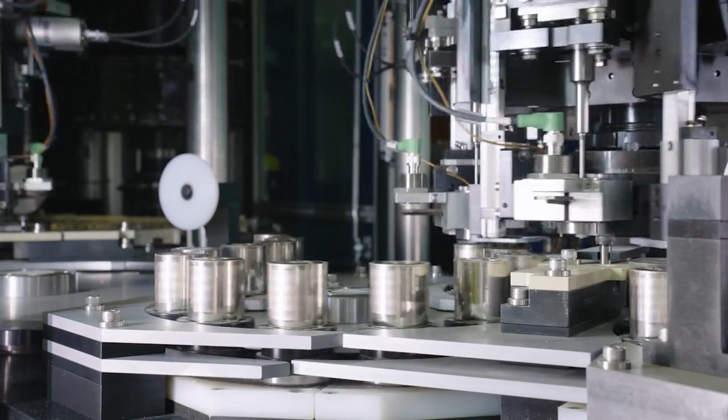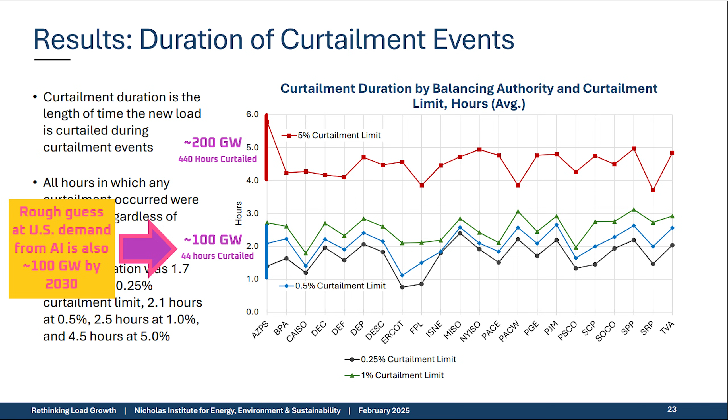In the last video of the Terawatt compute series, I showed that around 100 gigawatts of additional power is available on the US grid that's relatively easily accessible, which roughly matches the additional compute demand from AI that's expected by 2030. However, increasing pushback against data centers means that over the next 3 to 5 years, tech companies will likely start building their own generation off-grid. And after that, into the 2030s, space-based compute will become increasingly viable.

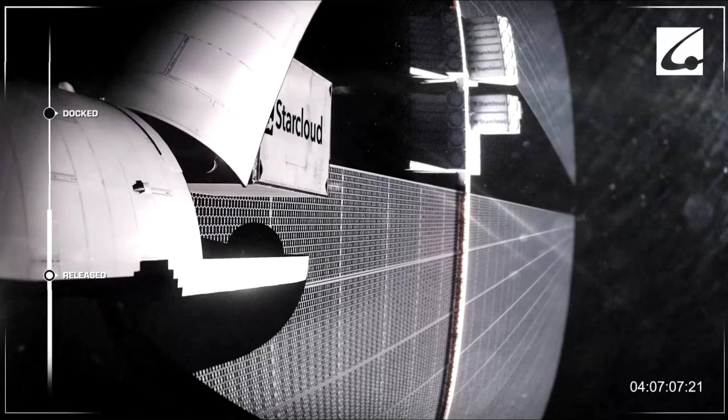So today, I'll cover how power generation for off-grid data centers will evolve, and how that could affect the end-to-end power supply of data centers. And in the following video, we'll look at the challenges, opportunities, and economics of space-based compute.

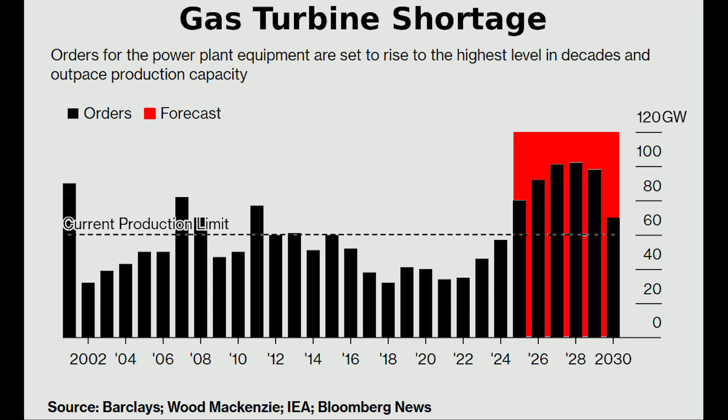That brings us to the second reason why 100% solar and battery systems will become more likely over time. The cost of solar and batteries are plummeting, so it's likely that by 2030, natural gas may just add cost and complication for a company that wants to build its own grid. If you had a natural gas turbine factory, why would you expand production if you can see that within the next 5 years there will be another, more scalable and cost-competitive technology eating up your market share? It makes more sense to just keep producing gas turbines on fully depreciated equipment until there's no longer demand for them.

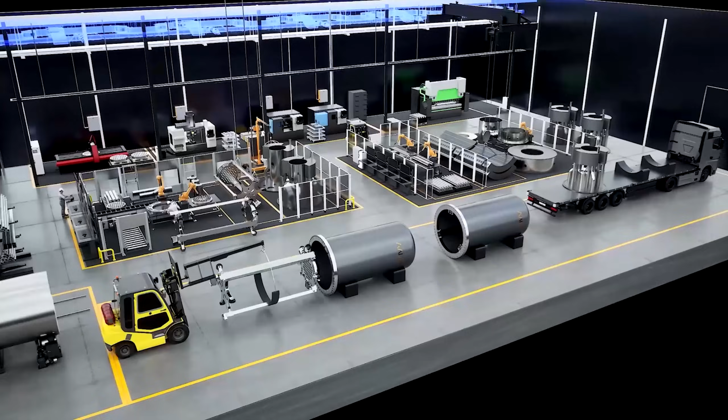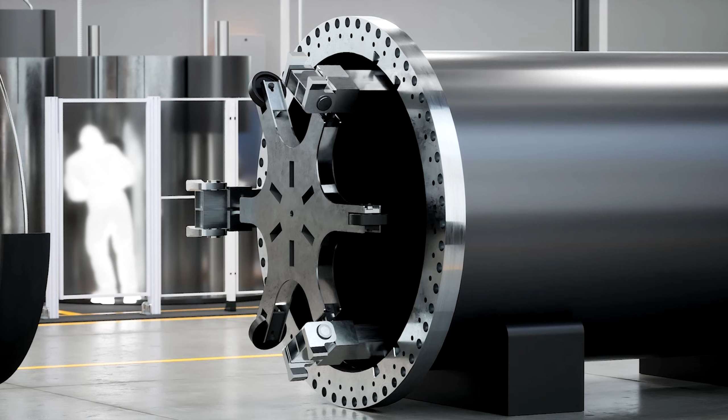What about other generation technologies? Let's run through the ones that are the most likely to come up in the comments. First, nuclear. In the US, we aren't going to see nuclear power at any large scale of deployment before 2035. Yes, the Trump administration is pushing hard on advanced nuclear reactors, but most are still currently at the prototype stage. After that will be full-scale commercial reactors, and then only after that will we see those nuclear reactors produced at high enough quantities to generate low-cost power.

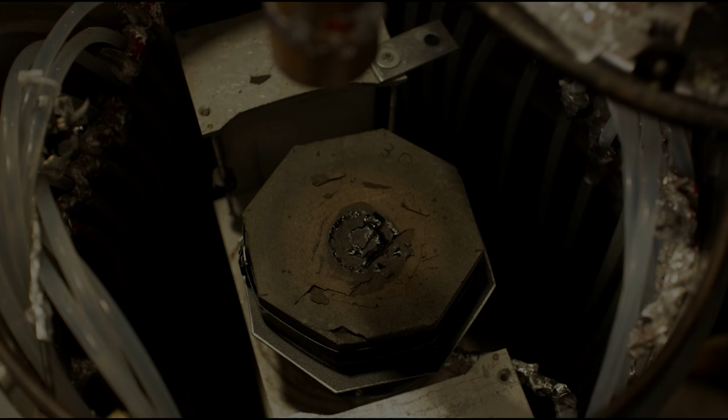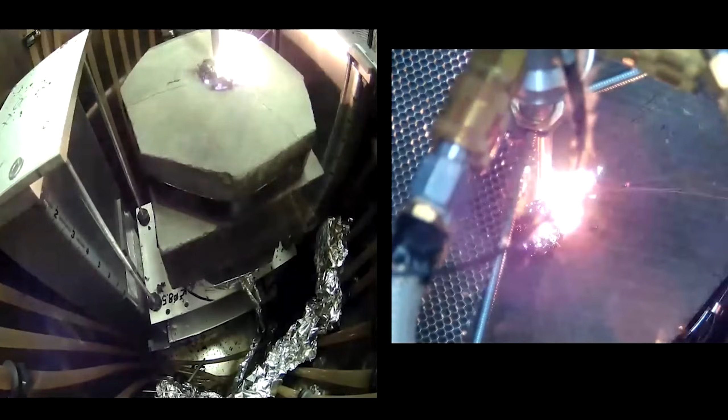Each of those steps will take several years. Second, geothermal. There are new geothermal technologies that do look very promising, but they're still at the prototype stage. So even if new geothermal technologies are successfully commercialized, it will likely be 2035 before we see them at scale.

Third, new coal generation is too expensive. Existing plants will keep running, and some shuttered plants will be restarted due to strong electricity demand, but that's about as far as it will go. Fourth, any type of hydroelectric power and pumped hydro is geographically limited, often faces public pushback, and takes a long time to build, so it's mostly a no-go.

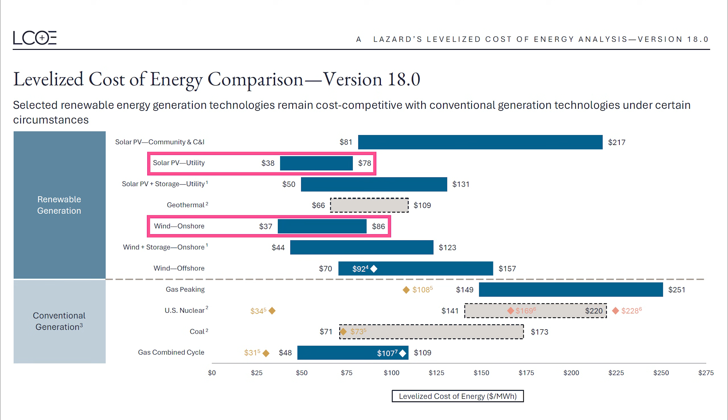Fifth, wind. Wind power is currently roughly at cost parity with solar, but the cost of solar is dropping more quickly, which means that in the future, in most cases, solar will be the preferred option. With all that said, some people might point out that solar, natural gas, and batteries face their own challenges as generation options. And that's true, but the challenges are less severe.

Starting with solar, it's currently facing political headwinds. However, that will only slow deployments, not stop them. Let's look at two examples. First, the Trump administration has said that they'll no longer approve solar projects, but that only applies to projects on federal lands or that receive federal funds. They can't do much to stop private companies from building their own solar projects off-grid.

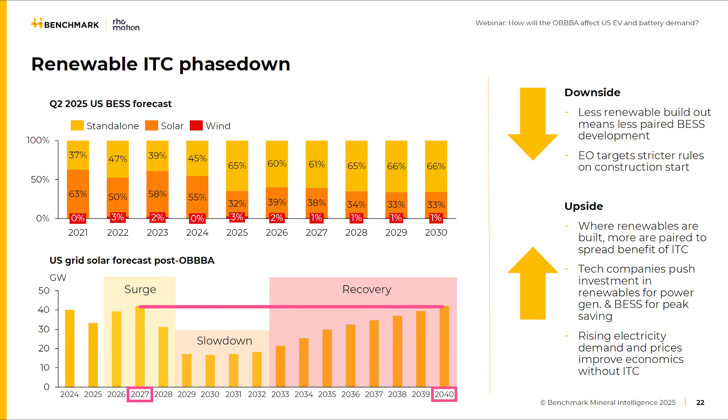Second, solar faces headwinds from both tariffs and a loss of tax credits for solar. The impact of those costs could kneecap grid-based solar deployments for over a decade. However, I think it's going to be a different story for off-grid deployments for data centers, and they'll be relatively immune to those headwinds. Why?

Power only makes up about 10 to 11% of the cost of AI cloud compute, which means tech companies can afford to pay a premium for the electricity with little effect on their bottom line. Their main concern is speed of deployment and scalability, which is where solar panels shine. They can be deployed rapidly and are available in huge quantities.

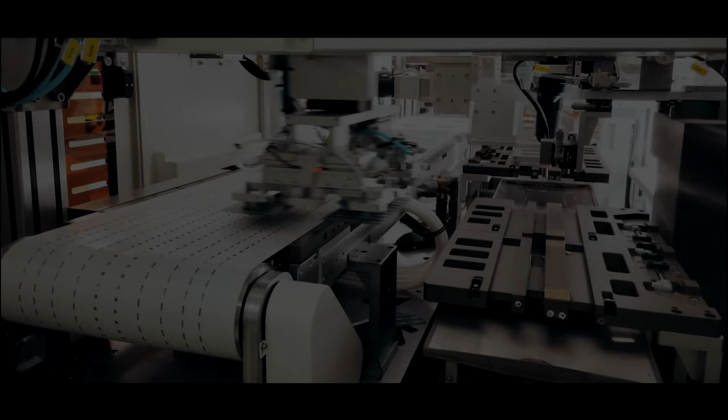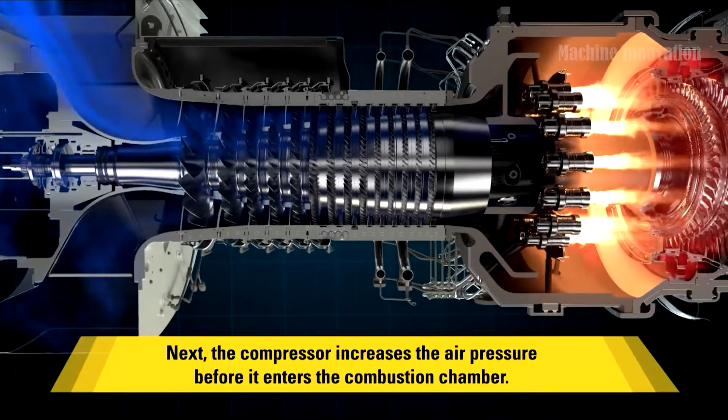As a side note, why is the production of solar panels scaling so quickly, and why is their cost dropping so rapidly? Because they're simple to mass produce using high throughput, highly automated, repetitive processes. That's as opposed to, for example, a natural gas generator, wind turbine, or nuclear plant that involve thousands of non-identical parts, which makes mass production and therefore scaling more complicated, slower, and costly.

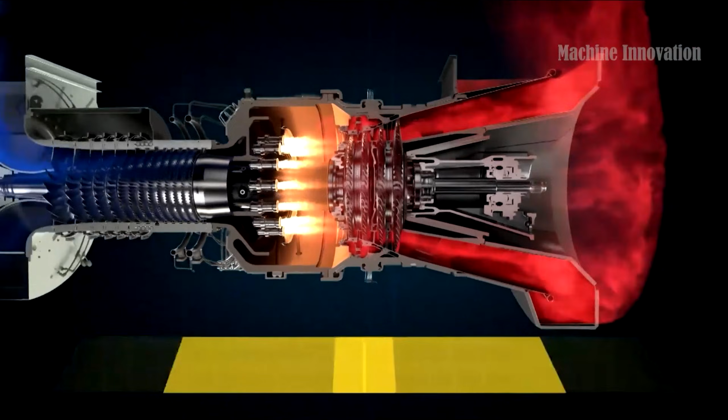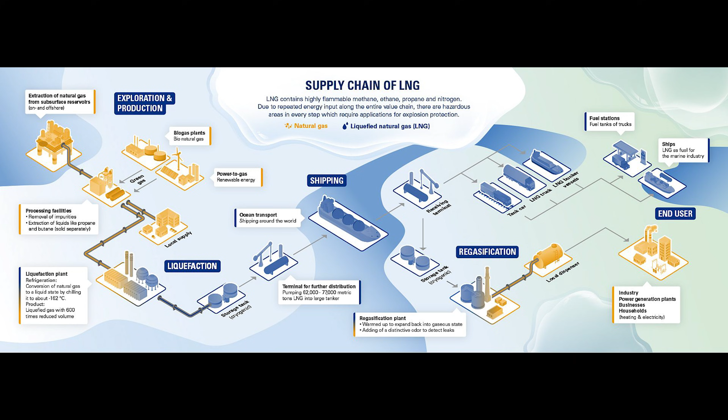Moving on to gas generation, besides the difficulty of manufacturing the equipment itself, even one highly efficient combined cycle gas turbine requires billions of cubic feet of gas per year to operate. That means developing and maintaining a huge amount of infrastructure to supply that gas, not to mention the cost of the gas itself. That's as opposed to solar panels, which have their fuel, photons, delivered weightlessly through space, directly from the sun, for free. That means relatively high upfront costs, but lower costs over the life of the asset.

Moving on to batteries, their primary drawback is that they need to be combined with other generation technologies to be useful. But in doing so, they provide such extraordinary utility that the market for battery grid storage products is exploding. That's because they increase the commercial viability of whatever on- or off-grid system they're plugged into.

If they're combined with fixed generation like nuclear, for example, they can step in to cover power demand surges. And if they're combined with intermittent generation like solar, for example, they can store the cheap, zero marginal cost power from the production peaks and release it later.

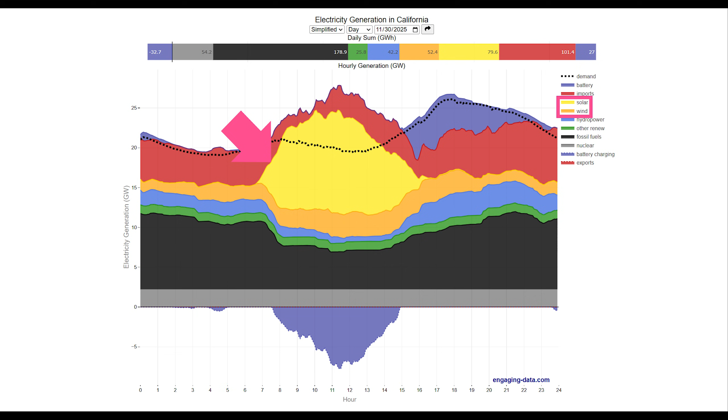With all that in mind, it should help explain why in the next few years the best combination of technologies to use for an off-grid system is solar and batteries with a splash of natural gas. Then, when the cost of solar and batteries comes down even further, switch to a system that's fully powered by solar and batteries. And that roughly aligns with Elon's estimates.

Although his reasoning was more likely tied to scalability, he said that for a data center of around 100 gigawatts, which should happen in about 5 years or so, the best option is probably solar and battery powered.

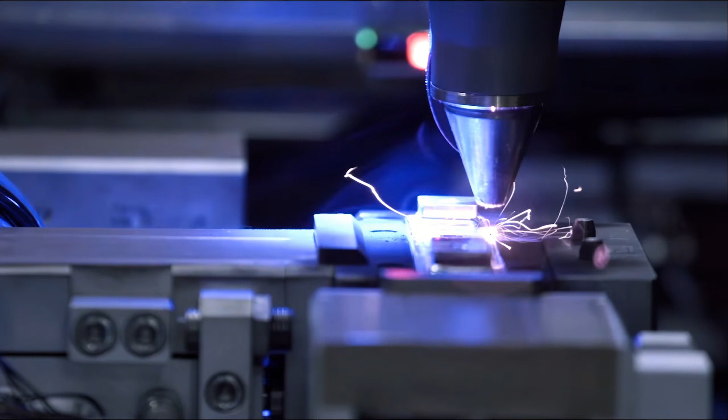With that in mind, let's look at how Elon expects to source the solar and battery capacity necessary to support 1 terawatt of compute. As for the battery storage, for Elon's companies at least, I don't see a bottleneck for the foreseeable future. That's because Tesla is aggressively expanding their production of Megapacks. Yes, those Megapacks are dependent on battery supply, but globally there's a huge and growing supply of battery cells, and Tesla's working on their own in-house supply.

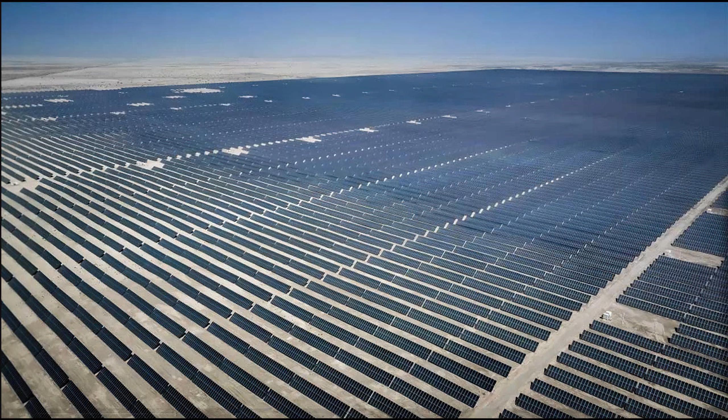However, with solar panels, things get more interesting. Let's take a look. Globally, there's already at least 1.2 terawatts of solar panel production capacity, of which only about half is being utilized. That means Elon's companies don't necessarily need to get into solar panel manufacturing to achieve Elon's compute ambitions. If that's the case, why is Elon teasing that it could be on the table?

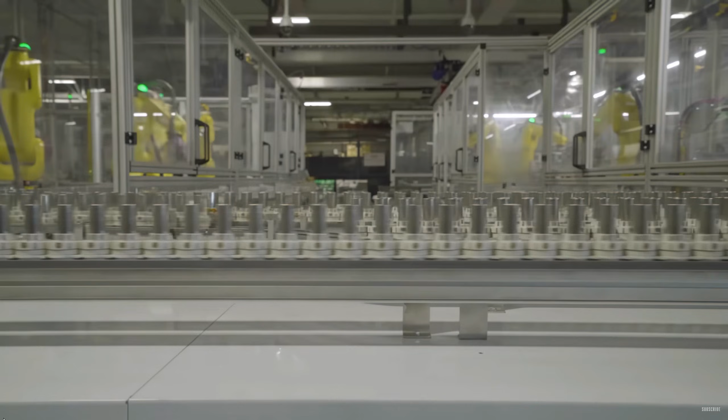First, it may just be that he's not necessarily looking at manufacturing solar panels in-house, but rather forming a tight partnership to manufacture solar panels like Tesla did with Panasonic and batteries. However, if Elon's ambitions outpace his suppliers, which often happens, Elon will bring it in-house.

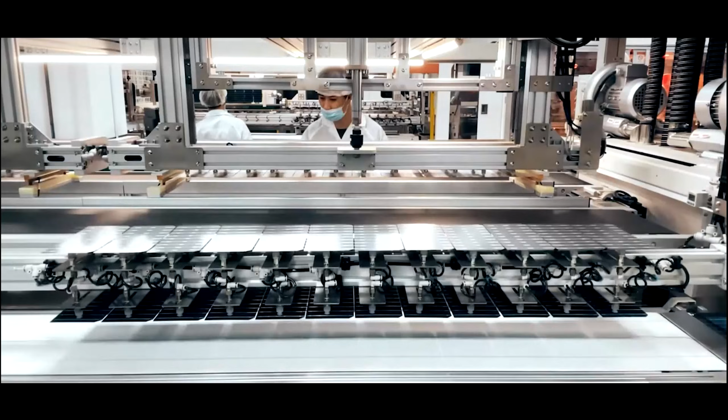Second, it might be worth manufacturing solar panels in-house just for the cost benefits. Currently, solar panels cost several times more in the US than anywhere else in the world. If the panels were manufactured in the United States by Tesla using highly automated facilities to reduce tariff and other costs, they could reduce the cost of their solar panels by at least 50% and likely closer to 70%. How much could that save?

1 terawatt of compute would likely require something like 10 terawatts of solar panels to cover the fact that those panels will only generate power about 25% of the time, and will have to be overbuilt to cover difficult periods like the middle of winter. A 50 to 70% cost reduction, or around 25 cents per watt, would net $2.5 trillion on 10 terawatts of solar panels, making in-house production worthy of serious consideration.

Lastly, besides removing potential scaling constraints and offering cost reductions, a third reason Elon might bring solar panel production in-house is if it becomes necessary for space-based compute, which may require specialized panels. But that's a topic for another video.

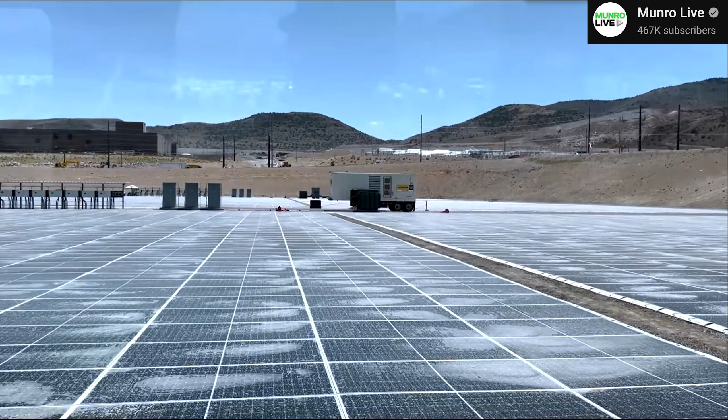Either way, whether the solar panels are produced in-house or purchased from a third party, building a terawatt of solar in the desert for AI compute could be done at low cost and as quickly as xAI or any other company could throw solar panels on the ground. In fact, as I said in the last video, it might actually be cheaper to go off-grid, because 2/3 of the cost of electricity is the extension cord, so to speak, that runs from the generation source to the data center. Another way to save money by going off-grid would be to strictly use DC power.

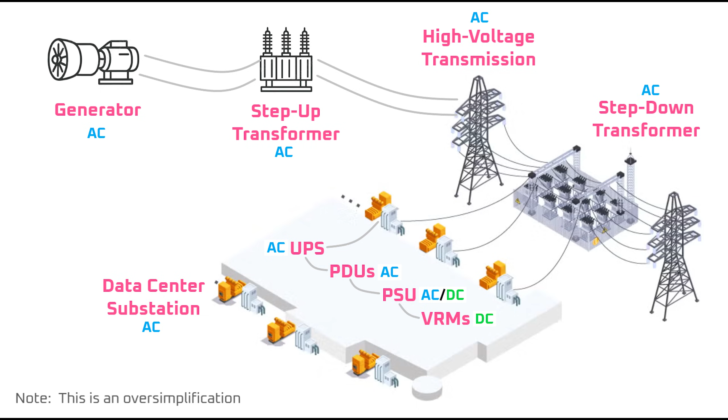The way AI data centers are run and powered currently is by taking mid or high voltage AC power from the grid and stepping it down to lower DC voltages to run the compute. That takes a lot of power conversion equipment and causes some of the power to be lost as heat energy. With an off-grid system, the power conversion could be mostly eliminated because solar panels and batteries naturally operate using DC power. Creating a purely DC setup would take a large initial investment, but if the ultimate goal is 1 terawatt of compute and beyond, it would be worth it.

Then, within maybe 5 to 7 years from now, they could have enough engineering headroom and will have had enough development time to make a version 3.0 data center that uses end-to-end DC, which could be the architecture that eventually takes them to 1 terawatt of compute. That's a wild guess on my part, so take it with a grain of salt. But I think it's a very real possibility given Elon's constant drive to eliminate parts and complexity.

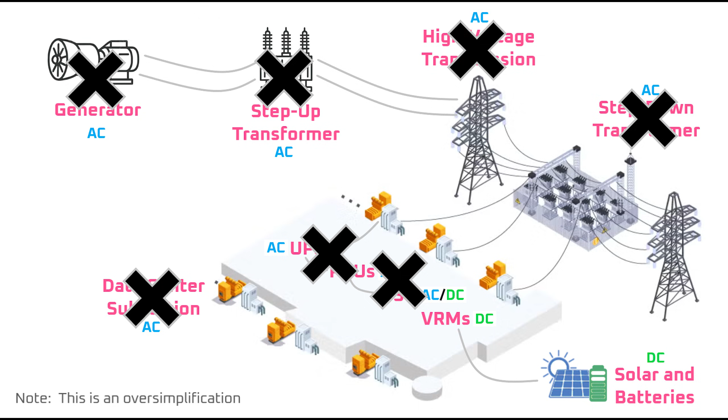With centralized compute out of the way, let's briefly cover the distributed compute that will be used in products like Optimus robots and robotaxis, which could demand an order of magnitude more power than the data centers.

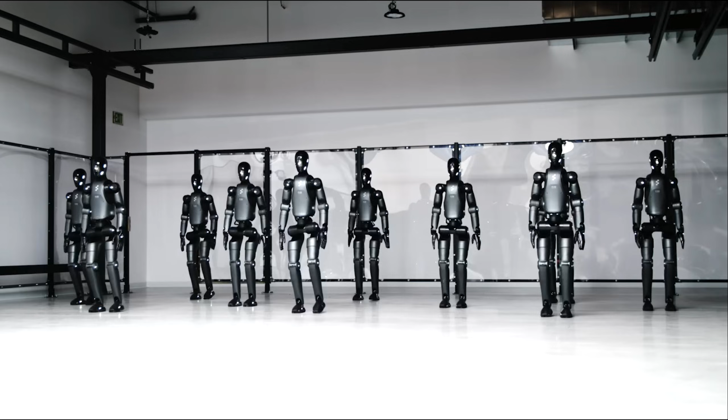Distributed compute is a more complex topic to cover because rather than involving singular data centers owned by individual companies that can operate their own off-grid generation, it will involve thousands of hardware and software products owned by millions of people that will be powered by a variety of generation sources. With that in mind, these are the broad strokes.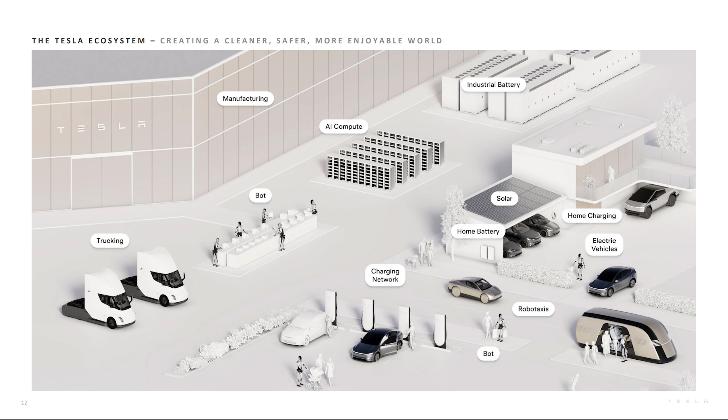For the compute itself, the deployment will be straightforward. The CPUs in many existing smart products will be replaced with AI chips, and there will be a variety of new products and services like robots and robotaxis. It's generating and delivering the power to that constellation of devices that will become tricky. The power could be delivered by the grid, or it could be generated more closely to those devices with rooftop solar and batteries. Each of those solutions face issues.

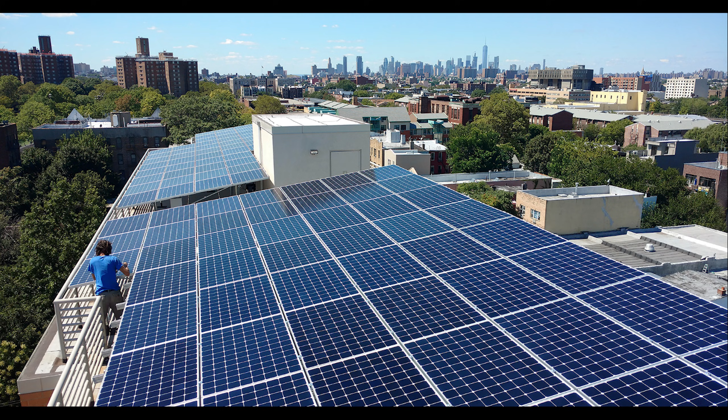For grid-based power, it takes, on average, 5 years to connect new power generation. And as I said a moment ago, it's costly to maintain the transmission and distribution to deliver that power, which makes up most of the cost of electricity. Rooftop solar is often the best and cheapest way to generate power because it sidesteps the drawbacks of building on the grid. But even in a best-case scenario, rooftop solar would provide only about 1.1 terawatts of power. That's because there's a finite amount of roof area. Not all roofs are structurally suitable for solar. They receive too much shade, or they aren't at the correct angle or face the wrong direction.

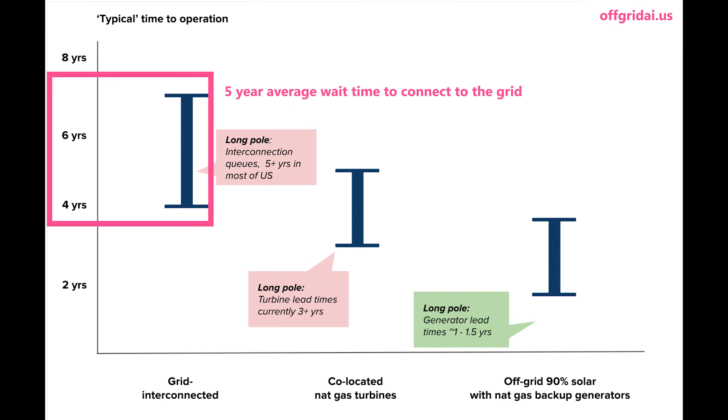In my view, this means we need to solve the fundamental problems associated with grid-based power. Stanford's 6 big ideas to help avoid a U.S. electricity crisis suggest ways to do just that. And for me, the most critical of those are streamlining permitting, making grid policies more flexible, and modernizing utility operations. With those changes in place, the free market would deliver the 10 terawatts or more of power generation that will be required for Earth-based distributed AI compute.

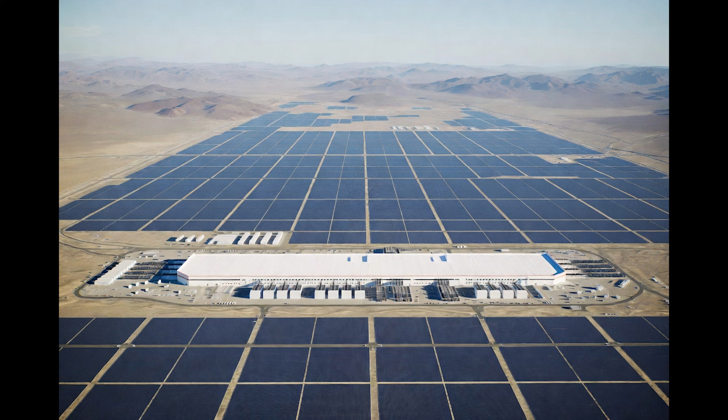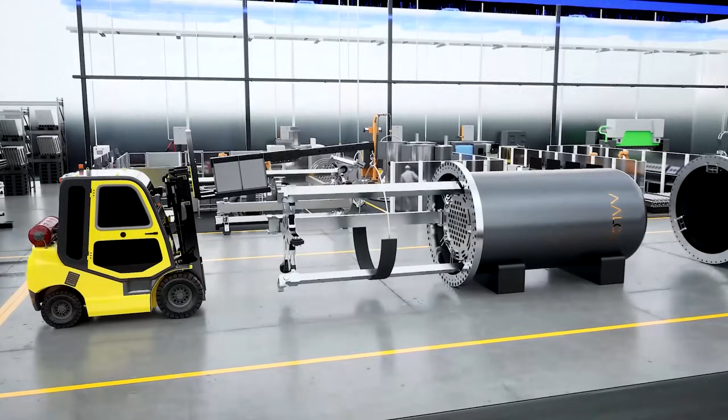In summary, for the foreseeable future, the clearest path to Elon's goal of 1 terawatt of centralized compute is solar and batteries deployed in the desert, with natural gas generation necessary in the short term and becoming optional in the long term. Deeper into the future, there may be other options like advanced nuclear and geothermal to firm up the solar and batteries, but they won't form the bulk of the generation.

The question is, how long will it take Elon to hit 1 terawatt of compute? Estimates are that globally, we could need 2.6 terawatts of compute for AI by 2035, and by 2040 it could be as much as 11 terawatts. If that holds true, it indicates to me that if Elon's companies take a reasonable share of the global market, that they'll hit 1 terawatt of compute between 2035 and 2040. That sounds unbelievable because it's the equivalent of matching the totality of the current power generation from the U.S. grid in 10 to 15 years.

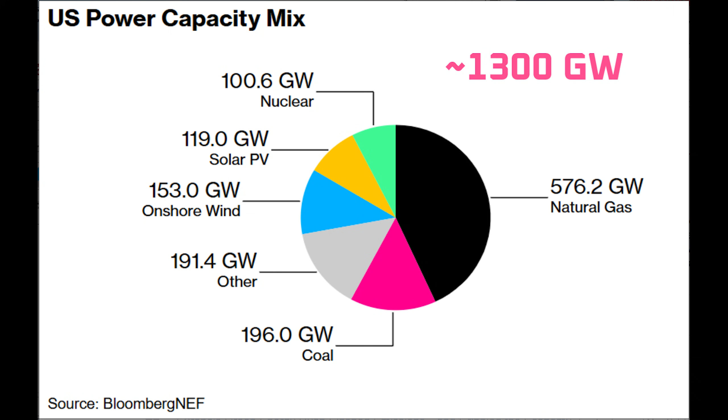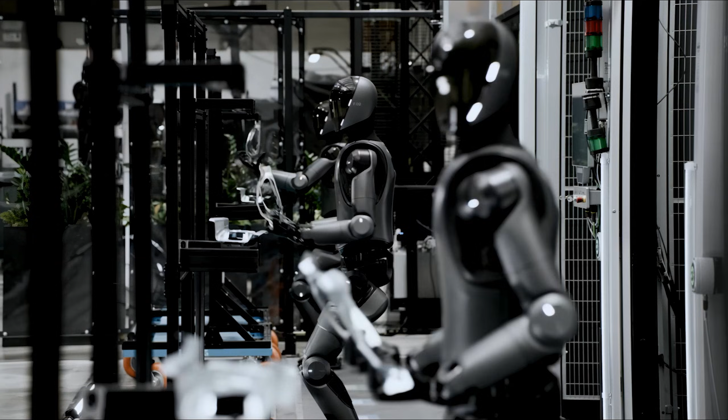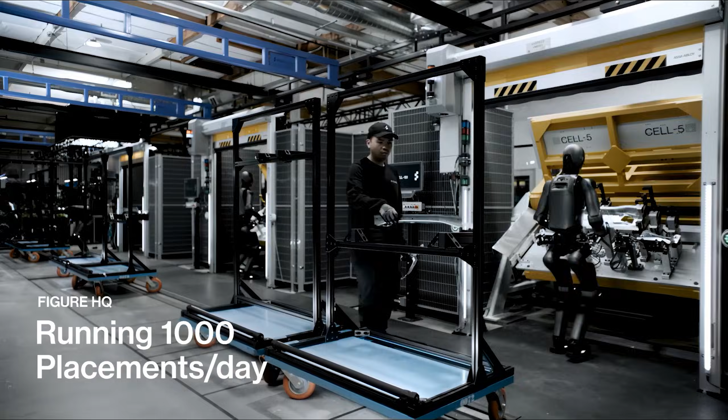However, most of the solar panel production necessary to achieve that is already in place. So it really comes down to whether the market is willing to fund such an aggressive build-out, and how much companies like TSMC, Samsung, Nvidia, and Tesla expand their chip production. I think the market will provide the funding, or it could end up being self-funding when it gets moving. That's because AI will provide mental and physical labor that's better than human labor at a small fraction of the cost, meaning huge demand and therefore huge revenues.

The next logical step after off-grid data centers on Earth is to start building them in space, which is what I'll cover in my next video of the series.